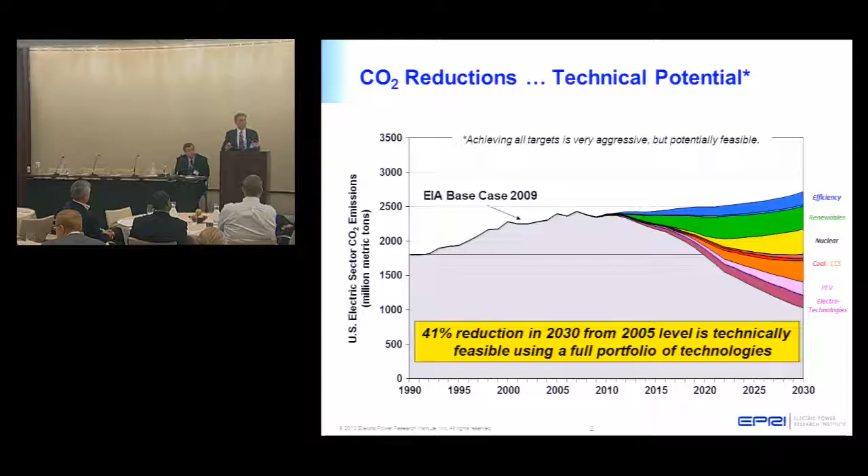You heard Kevin talk about uncertainty. All of you are facing it out there. What are you going to do with all these plants when you've got all this barrage of environmental regulations facing you? And so what we did is we developed a model, which I'll talk about in just a moment. But first of all, Kevin talked to you about EPRI. I'm not going to say any more words about EPRI. He did a nice introduction of what EPRI is.

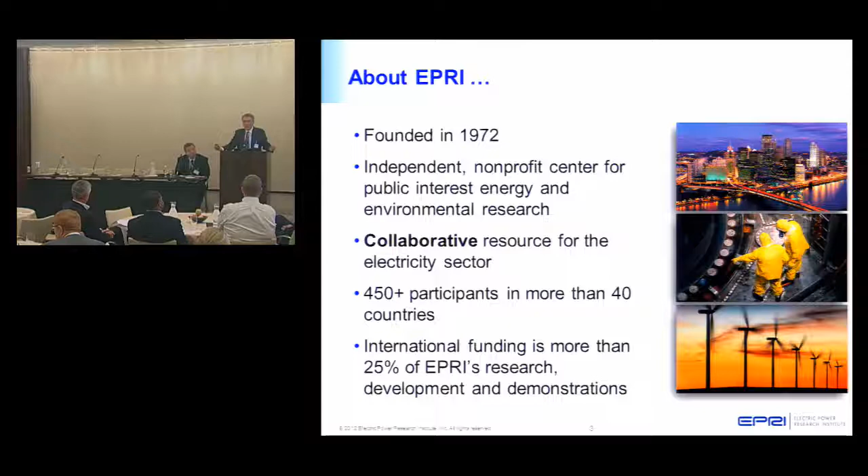But the only thing I will add to what he said is EPRI is a non-advocacy organization. We don't lobby. We don't push for positions. That's what Quinn Shea sitting there in the back of the room does at EEI. They advocate. He takes that information that we do, or you in this room can take the information that EPRI generates and go do your own lobbying, do your own advocacy kind of work. We do the research, do the analysis, we put it out there, we let people use it. We do not take any position. So that makes our research credible, objective, and fair. So people can argue with it and what our findings are, that's okay. Challenge us in what we do. But we're a totally non-advocacy organization.

All right, PRISM 2.0. I brought you up to date on what that is. PRISM 2.0 is a mathematical model of the U.S. economy, and I'll talk to you about that a little bit here in a minute. But it allows us to ask what-if questions. When you do modeling analysis and do scenarios, you can say, what if gas prices change? What if the performance of this particular technology doesn't live up to what it should be? What if it's better? What about the cost of the technology? Its availability? Those are the kind of what-if questions you can ask.

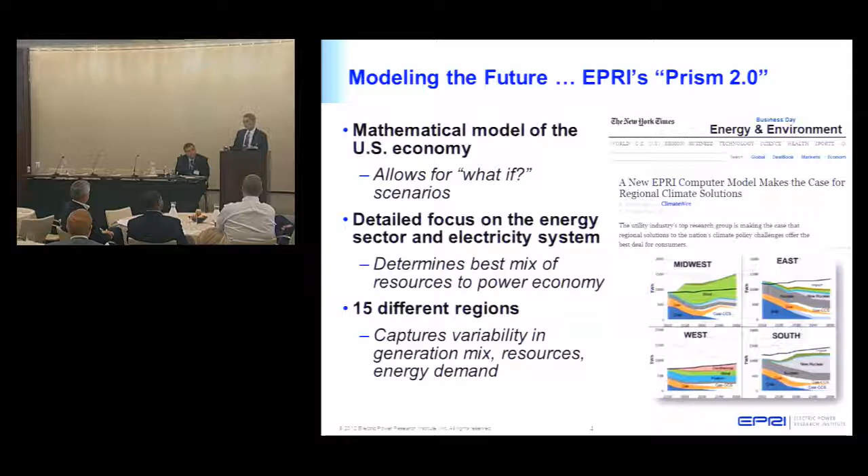And we also did this regionally. A lot of times when people do analysis of all these different kinds of regulatory analyses, they look throughout the whole U.S. But the U.S. is not homogeneous, right? Things are different in Florida than they are in California, in New York, in the Midwest. The economies are different. The technology is different. The resource mix is different. So we wanted to have a model that really looks at the various parts of the U.S. economy. So what we did is we developed a model called US-REGEN. It stands for the U.S. Regional Greenhouse Gas and Energy Model. It combines dispatch and capacity expansion with a high-level computable general equilibrium model of the U.S. economy.

So we developed this model. We developed the model internally at EPRI because we felt we needed to have our own tool rather than using other people's models. Of course, when you develop a model, you've got to have data to run the model. You've got to have data on technology. You've got to have data on the economy of these different regions. And so we at EPRI obviously develop a lot of information on control technology cost and performance, and so we can incorporate that information and other information into this model.

We did this analysis in two phases. One was on what I'm going to talk about today, the environmental rules and regulations that you're all facing now. That's phase one, and those results are available. That report's been published. The second phase that we're working on now I will not be able to tell you about, but I can tell you generally what we're doing. We're looking at three different scenarios on CO2. One is a CO2 tax scenario, so many dollars per ton of CO2. What would the implications of that be?

The second one is a carbon efficiency scenario. Think about it as the NSPS that EPA is rattling around about for existing units and new units, 1,000 pounds per megawatt hour kind of number. And the other one is a clean energy scenario, where you would get clean energy credits depending on your mix of generation. So you'd get higher credits for nuclear or for renewable energy that doesn't produce any CO2, some kind of partial credits for natural gas combined cycle, zippo credit if you have coal. So those are the analyses that we're doing now. That report is in final preparation, under review. It'll be out sometime this summer or fall.

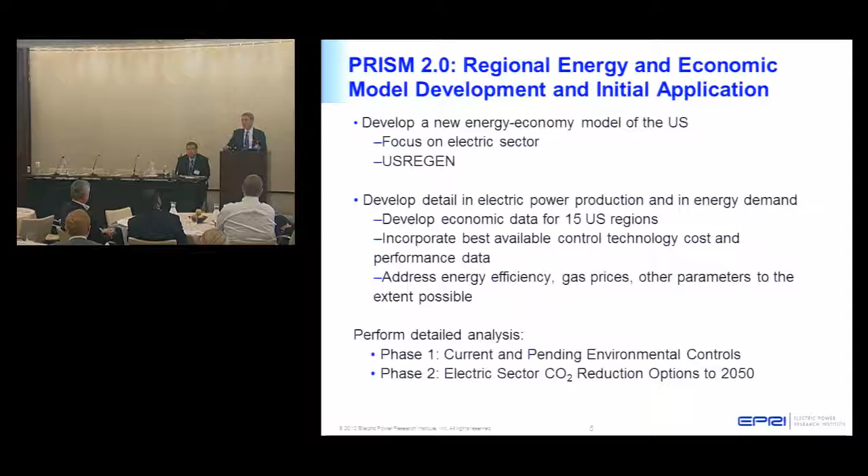All right, here are the regions that we modeled. There are 15 regions here. We picked them so they're loosely related to the NERC regions, but I call that very loosely related. Also, California, Texas, and New York are kind of their own islands when it comes to energy policy, and so we broke those out separately. We also try to look at the resources. There's more wind in the Midwest, for example, so we wanted to have that as a region. And in the Northeast Central, we have both competitive markets and regulated markets, so we had to try to break it out that way. So this is what we did in terms of developing our tool.

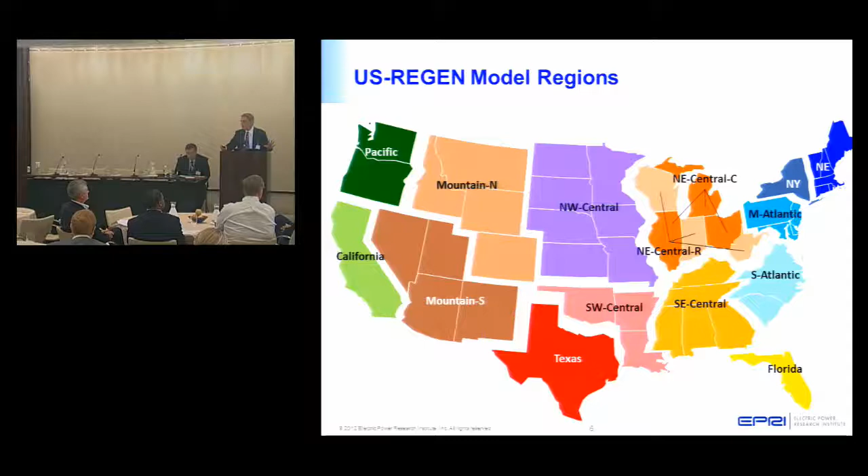It's very important, before I start showing you results, which I will do here in a moment: what are the limitations of models? Models are approximations, they're representations of very complex systems. We are not trying to model every one of the electric power companies sitting in this room. It can't be done in a model like this. So you have approximation errors. We can't really look at the system dynamics like you can when you do your modeling within your companies. And of course, the data quality we get is as good as we can get, but still there are inconsistencies in data quality.

It's very important that when anyone stands up here and shows the results of modeling exercises, we're not trying to predict the future. We're only trying to do a number of analyses, do scenarios, ask what-if questions. You heard Kevin talk about uncertainty, trying to narrow that uncertainty, so you sitting in this room can make better decisions. That's the purpose of these models. And not only that, but there are a lot of things we can't model. We can't model how policies could change at the last moment, how a permit process may change at the last minute, how siting decisions may change at the last minute. You've got to do the best you can. So again, models and the analysis I'm going to show you are just trying to get insights to help you narrow uncertainty.

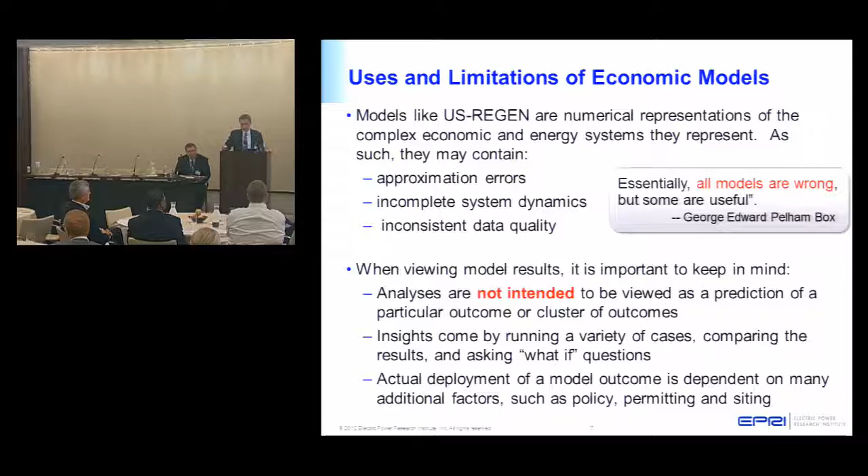See what George Edward Pelham Box said: essentially, all models are wrong, but some are useful. We hope that the REGEN model that we've developed is useful, but certainly it's not perfect. All right, let's get into some of the analysis. What we looked at in our study were four major boxes, if you will, of environmental rules and regulations.

At the time we were doing the study, which we started in late 2010, the cross-state air pollution rule was still underway at EPA. As all of you know, that rule has been vacated. It was vacated in, I think, August of 2012. As you notice, the report came out in September of 2012. So at the time we were doing the study, we were assuming CSAPR, the cross-state air pollution rule, was going forward. Also, we wanted to model the ambient air quality standards because they affect all of you.

Ambient air quality standards for SO2, for NOx, for particulate matter, for ozone. States do the state implementation plans. That has an impact on all of you too in terms of your emission reductions. Then there's that thing called MATS, the Mercury and Air Toxics Standard. Major impact on everyone sitting in this room. And finally, on the water issues, the Clean Water Act 316(b) rules for impingement and entrainment control, and the coal combustion residuals rule.

The important part about this is that you sitting in this room, you don't look at these rules individually and say, well, what am I going to do about MATS, putting blinders on to CSAPR, putting blinders on to 316(b), putting blinders on to the coal combustion products rule. You say, what are all these rules going to do in total with each one of my facilities? I need to look at what are going to be the combined impacts of this.

What we didn't include in this analysis were the effluent guidelines, which were just issued by EPA. That's not part of this analysis. We're thinking maybe we should overlay that on top of all this too to see what those implications are going to be.

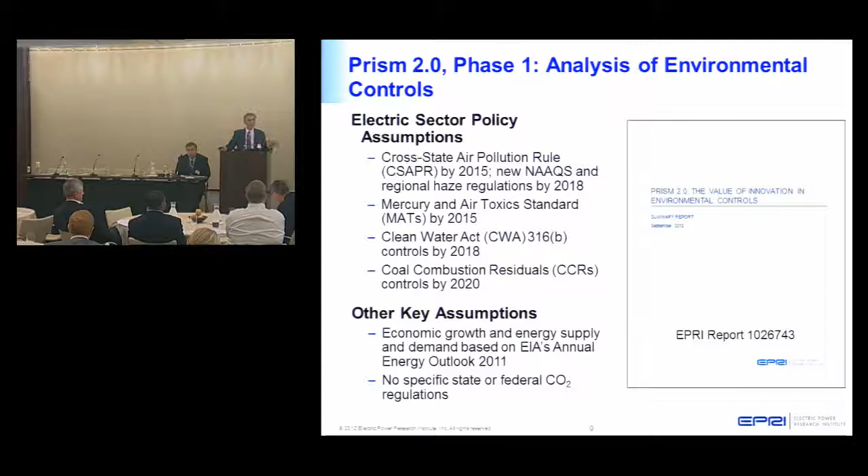So we ran three cases. I'm going to show you the reference case scenario. Then we ran a higher cost case and what we called a flexible case, a lower cost case. But let me just give you the highlights of some of the assumptions we made in coming up with these numbers. And what we show here is generation in terawatt hours over time.

For SO2, we assumed under this reference case that plants burning bituminous coal are going to have to use some kind of FGD system, wet or dry FGD system, lime spray dryer, or more likely a wet FGD system. For NOx, all power plants are going to have SCR. Actually, going back to SO2, the emission limit that we assumed would be 0.15 pounds per million BTU under this scenario. For NOx, 0.1 pounds per million BTU using an SCR system.

For mercury, we assume that most plants are going to have some sort of FGD or SCR. They may have to do some trimming, some activated carbon injection, maybe some particulate control upgrades for mercury control. Otherwise, they'd have to put in an activated carbon system with a baghouse. For 316(b) rules, in this reference analysis, we assumed all plants that didn't have cooling towers would have to put in cooling towers for closed cycle cooling. And for coal combustion products, we assumed the non-hazardous waste or Subtitle D regulations under RCRA. So those are the key assumptions in this analysis.

And what you can see is that virtually every power plant is going to have to be retrofit. Very few power plants, hardly any power plants today have those combinations of technology on them. So they're going to have to be retrofit. So coal-based generation is going to decline. So you see here, right there, coal-based generation starting to decline after about 2015.

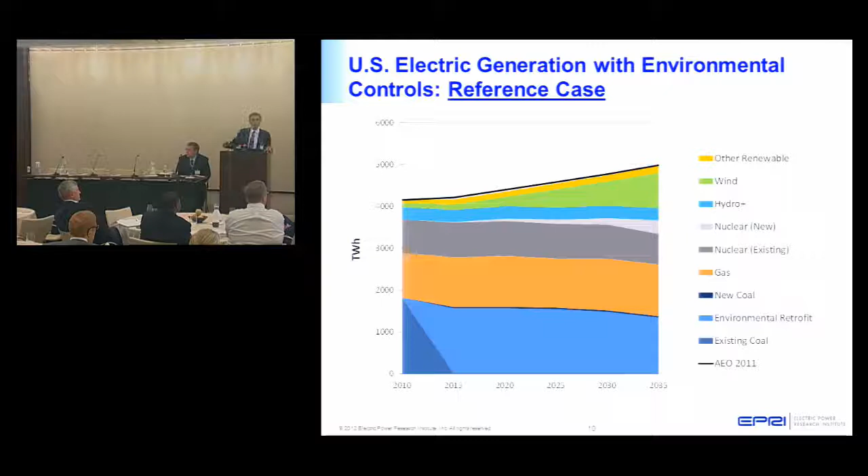No new coal, as I said, no new coal is here. That would be new coal. Nuclear, some new nuclear. We allowed new nuclear after 2020, and quite a bit of an expansion of wind, of renewable energy. And this is mainly due to price declines that we anticipate for wind energy going forward.

So I said we did this. This was the regionally based model. I couldn't in one slide show you 15 regions, so we kind of combined them here into 4 regions. But you can see, even if you combine this into 4 regions, that you see regional differences. Looking at the western and midwestern part of the United States, you see that the coal-based generation here stays relatively flat in the Midwest and the West.

And that is because those are the larger, newer units that are in the West and in the Midwest, compared to the South and the East, where you see significant coal declines. Coal, I probably could do it over here on the other side, but you can see declines in generation in coal. That is because they're the older, smaller, less efficient units that are retiring or refueling with natural gas.

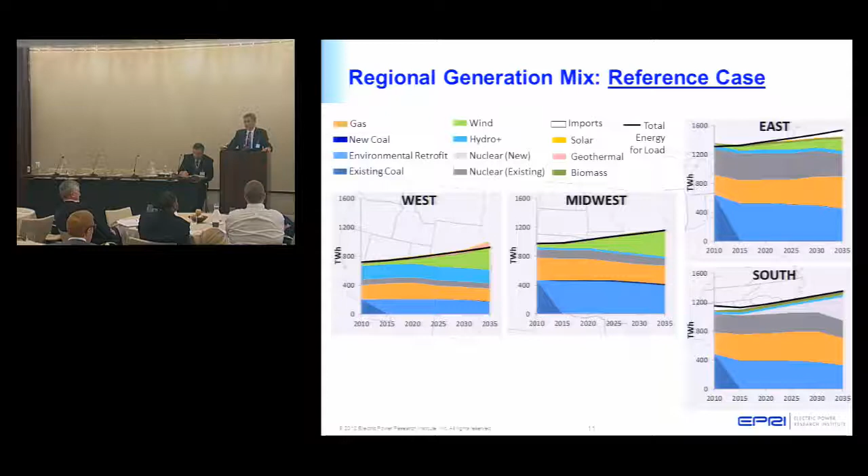So what about retirements? Under the reference case, the model predicted roughly 57 gigawatts or 57,000 megawatts of coal capacity would be retired or refueled with natural gas. We don't know. Those are decisions you're making at your company, whether you could refuel or you need the capacity at those sites, whether you would retire it, or in some cases I've talked to people who are just going to mothball it. They're not going to make any decision. They're just going to mothball those units. So again, these are the older, smaller, less efficient units.

But then you got this kind of 28 gigawatts here in the middle that are really going to be company by company decisions. Your cost recovery period for capital is going to be a very important decision process. Your region and unit specific decisions. Some of these are must run units. You may not want to keep them, they're old, but you must run them for voltage control or whatever it is in the region. Changes in market prices.

You may think that over time our economy is going to improve, or because there are going to be constraints here in our market, it's important to keep this unit, even though it may not look very economic. I expect prices to go up, and therefore it might be worth keeping this unit. So those are some of the factors that are in here. There's a lot of uncertainty. That 28 gigawatts is a lot of uncertainty. A lot of you probably are sitting here scratching your head going, I'm not sure what we're going to do with these units.

And the model, it's really razor edge decisions because the model makes an economic decision. But those are the ones that we looked at in our model that were really going to be difficult. But the other important part is there's still 227 gigawatts of coal capacity that are going to operate. Coal is not going away. That's still a lot of coal capacity that's still going to be operating in the U.S.

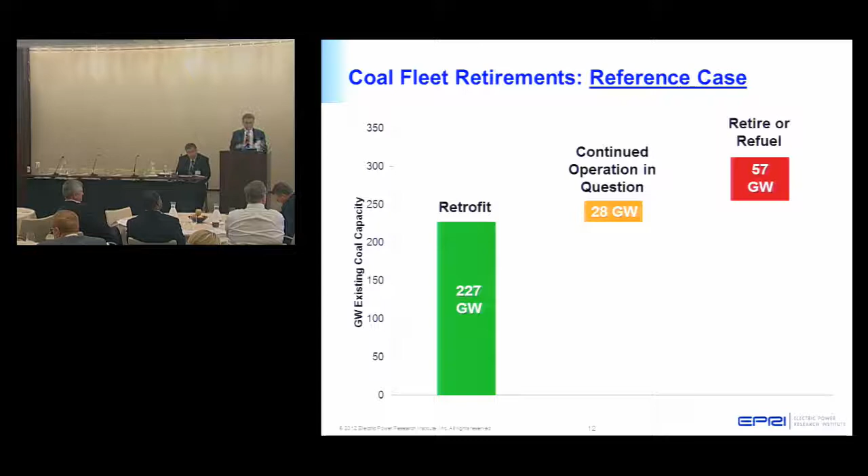So I said we ran several scenarios. We called them our high scenario and our flexible scenario. Think about it as inflexible and flexible. Under the high scenario, we basically said there's not going to be enough time to really look at lower cost options for SO2 control, for example, using dry sorbent injection. You're going to have to go with the tried and true. You're going to have to use wet scrubbers or lime spray dryers, the technology that's been around forever. You're not going to have time to go test much of anything.

We also said that there's going to be some cost escalation in this high case. Think about when there was a high demand for combustion turbines many years ago, and GE and others were saying, if you want to get higher in our list to get these turbines, you're going to have to pay a premium. Well, if the time constraints that EPA has put out are such, there may be constraints on labor and materials, whether the vendors that are sitting in this room can really supply the technology rapidly. So we looked at the literature and said, let's put in a supply constraint.

That would increase the cost of the technology, given very little time flexibility. And also in the high case, all power plants would have to have closed cycle cooling. You'd have to put a cooling tower in every plant no matter what.

So that's the high case. The flexible case is just sort of the flip side of that. Now that you've got some extra time, the administration, EPA, grants the extra 2 years, you have some additional time for compliance, you have time to test lower cost technologies, to see whether or not these technologies will perform as you hope they will perform on your facility.

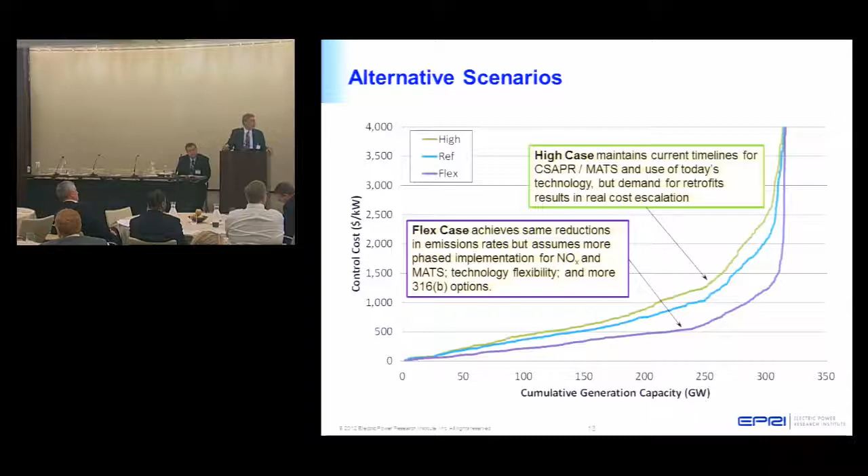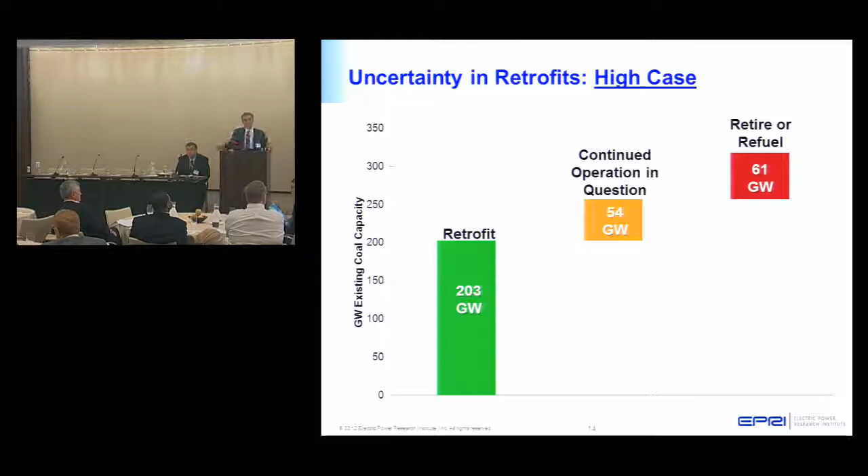So now you look at the high case, the high cost case, the kind of less technology flexible case, and you see now what have you got? You got more units that are going to retire because you got higher costs. You also got more units that are in this middle category of what am I going to do with them? Because now your costs are higher. And of course, you've got less coal that would be retrofit, just because, again, higher cost, shorter time constraints. When you look at the flex case, it's different.

The difference in cost on a net present value basis between the high case and the flex case is $100 billion. And that's a lot of money. On the high case, the total cost to this industry on a net present value basis is $275 billion. That's to the U.S. economy. That's a lot of money. And most of it's incurred by the electric sector.

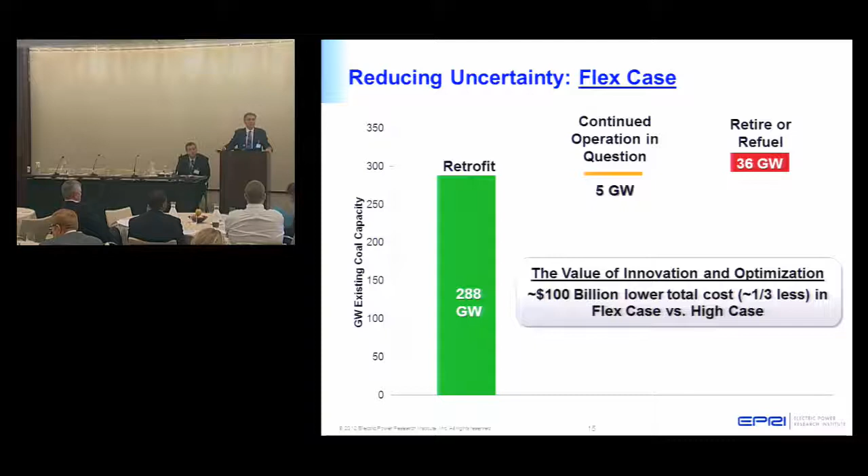And $100 billion is a lot of money, and I don't know quite where this is all going to come down in terms of what these rules are going to finally cost all of you sitting in this room. But nevertheless, if it's $175 billion, that's still a lot of money because it translates into cost of electricity for all of us that are consumers of your product.

This just shows you in a bar chart the cost on the high case and the reference case on a net present value basis for gross domestic product. As I said, most of the cost, whether it's $275 billion or $175 billion, is going to be borne by the electric sector. There are costs to the U.S. economy for higher costs of electricity, higher costs of natural gas, as the demand on natural gas is going to go up. So out of that $275 billion, something like $230 billion or $240 billion, I can't remember the exact number, are cost to the electric sector. The remainder is cost to the U.S. economy.

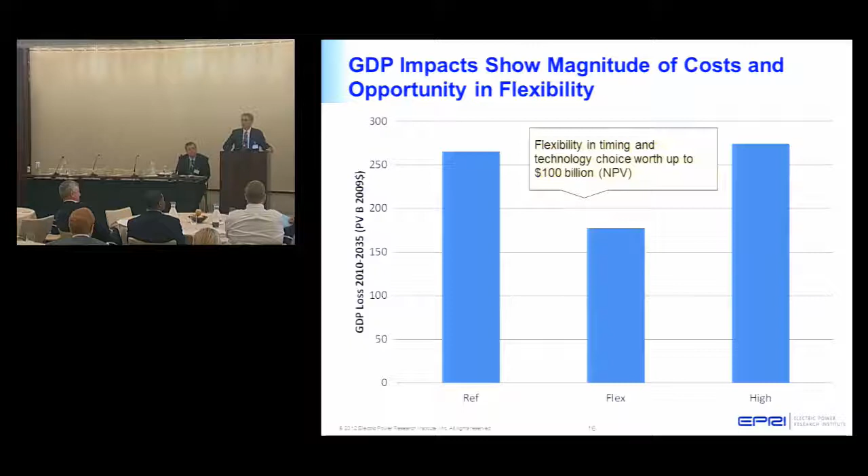I mentioned gas prices. When we ran this analysis, we used the prices that EIA had for natural gas. At that time, for AEO 2011, gas prices were something under $6 a million BTU. Where are they today? $4-ish a million BTU, something like that. And so we decided we needed to run some sensitivity on gas prices. So we did +2, -2: up $2 a million BTU, or less $2 a million BTU.

And you can also see, when we were finishing the analysis, we had the AEO 2012 numbers, which is this yellow line shown here. And I was at a conference last week in Washington, and AEO 2013 came out, and the prices for natural gas are further down, lower yet. It's a curve that kind of goes down here. But even the price difference between 2011 and 2012 from the Annual Energy Outlook, AEO, was about $1 a million BTU.

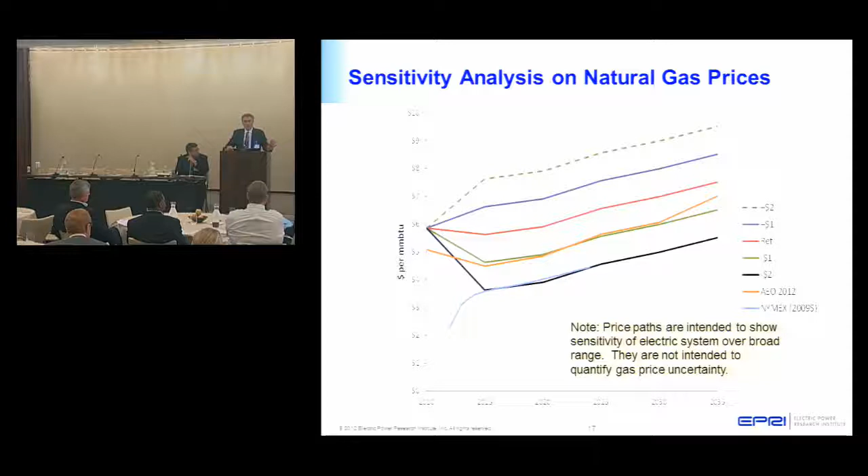It was significantly lower, and it was lower again for 2013. So we ran this analysis to see what the impact of natural gas prices is, because all of you sitting in the room know this has a major impact on your decision process. So when you look at it from the retirement standpoint, as you can see, if the gas prices were actually higher than when we ran the model, there would be less retirement, right?

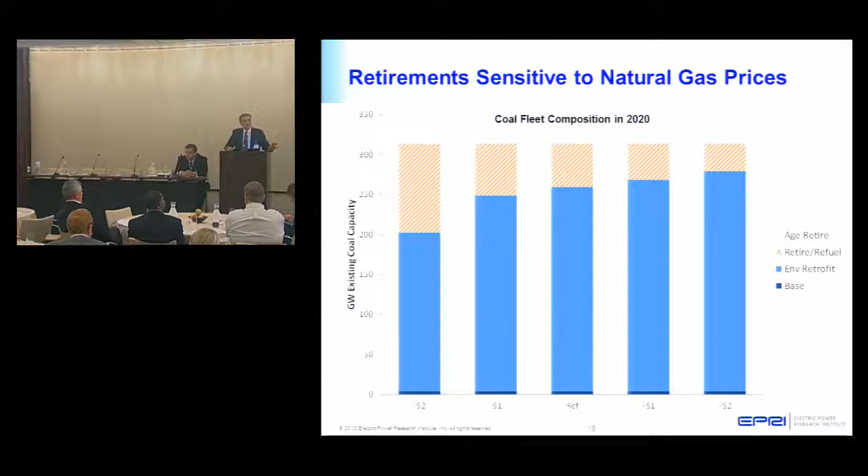Because if natural gas prices are higher, you go, you know what, coal looks pretty good under gas prices at $8 a million BTU. But if you get gas prices down here around $4 a million BTU, this is where you see a pretty significant drop in coal-based generation or coal capacity. And for those of you looking at the coal markets and the gas markets, $4 a million BTU gas versus coal prices today, that's when things are starting to reach some parity, around that gas price. So from our modeling, that's what showed up here as well.

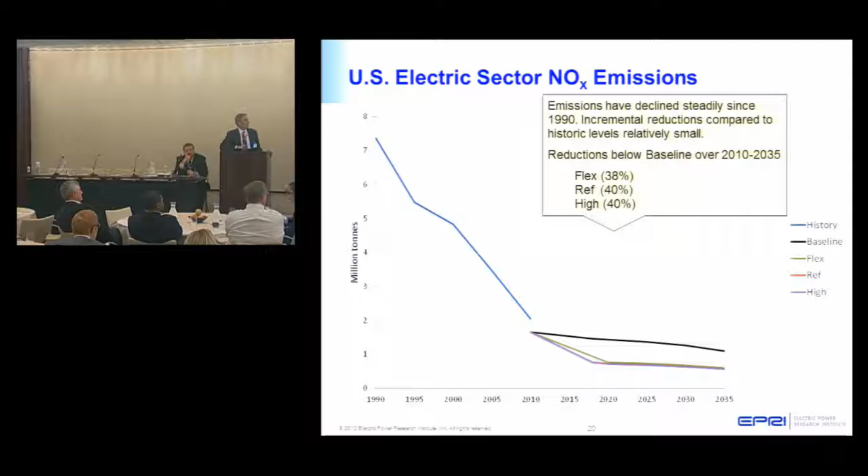But the last point I want to make here is even at 1 million tons per year, you know what the highest emitting sector of SO2 emissions is in the country? The electric utility sector. It's still going to emit 50% of the SO2 emissions in the U.S., even at 1 million tons per year. Similar story with NOx. I don't want to belabor it, but if you extend the timeline by a couple of years, the net increase in NOx emissions is going to be very, very small.

All right, insights. The cost range that I said, somewhere between $175 to $275 billion on a net present value basis from 2010 to 2035. Is it going to be as high as 275? Probably not. That was the inflexible case, the high scenario case. I fully expect that EPA and the administration will allow some flexibility, so the numbers are going to tend toward the 175 rather than 275.

And this cost range is really driven by the ability to deploy lower cost technologies, the ones that you, the vendors out here, are developing to help these utilities say, look, there are alternatives other than putting on a full-blown wet scrubber, which is very expensive on a relatively moderate size unit. There are some things you can do that are least cost. And so we thank all of you in the vendor community that do that. The cost impacts are going to be higher, obviously, in the coal regions where coal is dominant. Gas prices are going to be extremely important, as I've mentioned several times.

Retirements are going to vary substantially. I'm sure some of you are still scratching your heads about, am I going to mothball this unit? Am I going to retire this unit? Am I going to convert it to natural gas? What am I going to do with these units? Coal is going to play a significant role. Those people that say coal is going away, it's not going away. There's still going to be a significant amount of coal in this country.

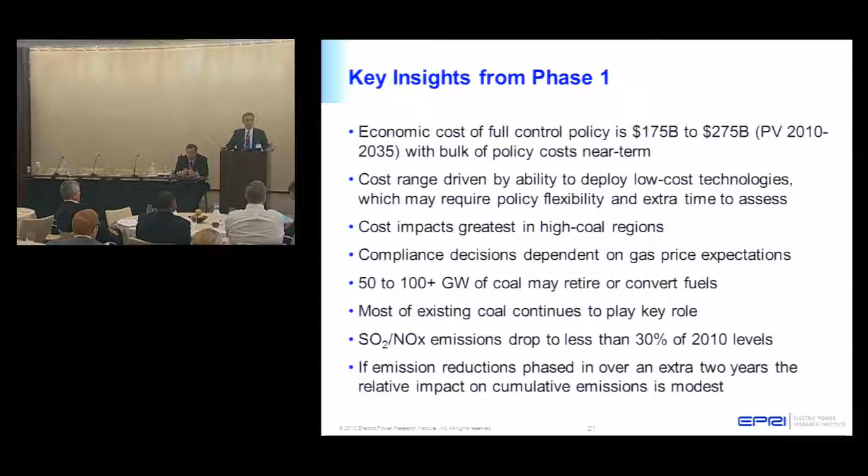And if these emission reductions are phased in over an additional couple of years, there's a very modest change in terms of emissions. So, kind of summing up, there's a lot of opportunity out here for innovation. And again, I'd like to thank those of us in the vendor industry that work with EPRI as well to try to come up with innovative technologies to lower cost for all of you, because lower cost of compliance means lower cost of electricity.

Also, the research community, the vendor community, we're trying to help all of you sitting in this room clarify your retirement retrofit decisions. These aren't easy. These are extremely difficult. Reduce your total compliance cost and meet these desired emission rates. They're not going to be easy, and you've got to do it on a continuous basis. You're going to have continuous emission monitors for most of these things, and these are tough. Measuring PM on a continuous basis is difficult. Measuring mercury at very low concentrations, extremely difficult.

But kind of the bottom line is, is this the end? Once this is over, is this the end of emission controls on power plants? I don't know. Quinn can talk about that when he gets up here. But my guess is that you've got this thing called CO2 still looming out there. What are you going to do about CO2 if it comes? What are you going to do with those coal units? Carbon capture and storage, extremely expensive technology.

And also, even with hazardous air pollutants, EPA has to do something called a risk analysis. A risk analysis once all the controls are on power plants. And is that sufficient? It's called a residual risk analysis. Is that going to be sufficient where we are today? Or are we going to have to do further on arsenic, chromium, mercury, go down the list of hazardous air pollutants? So that's my story, and I'm sticking to it.

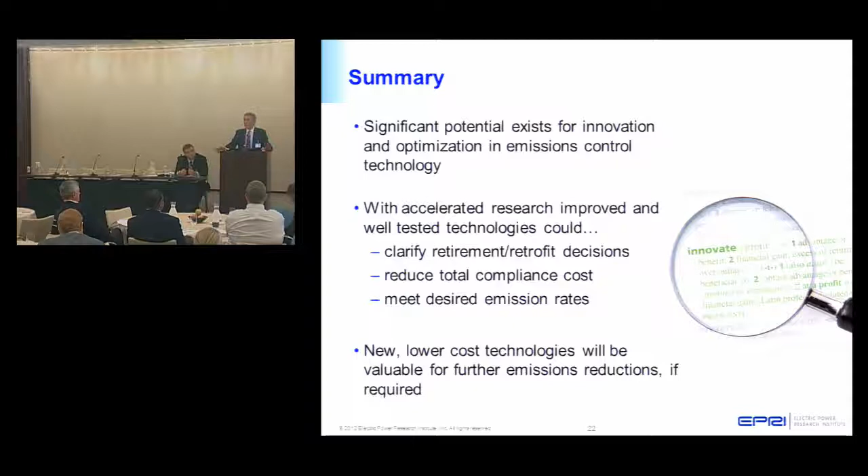You spoke a lot about innovation and room for optimization. And then at the same time, you said that there is a tight time window. And if I add to that the time scale that we know it takes for procurement, permits and so on in the United States, how is all that going to fit? Where is the time for innovation to come in and help those that need to deploy emission controls? Yeah, the question is, where's the time for innovation?

It's difficult. I mean, it is really difficult to bring a new technology to market, and all of you know it, and those of you that are in the vendor community, it takes a long time to do it. So the innovations we're really talking about here are, for example, can we use dry sorbent injection technology on units where maybe we thought we couldn't use them before? And if you're going to use Trona, or maybe something like a sodium-based sorbent, you've got to think about the multimedia impacts of that. What is that going to do to my ash now that I have a soluble product?

And if I'm in a net rainfall area, oops, I've got this thing called the coal combustion products rule that's coming down the road from EPA. And now I've got solubilized product that I've got to manage as well. What am I going to do about that? So your question is right. A two-year extension is not going to allow for truly new innovation in technology. It's not going to do it.

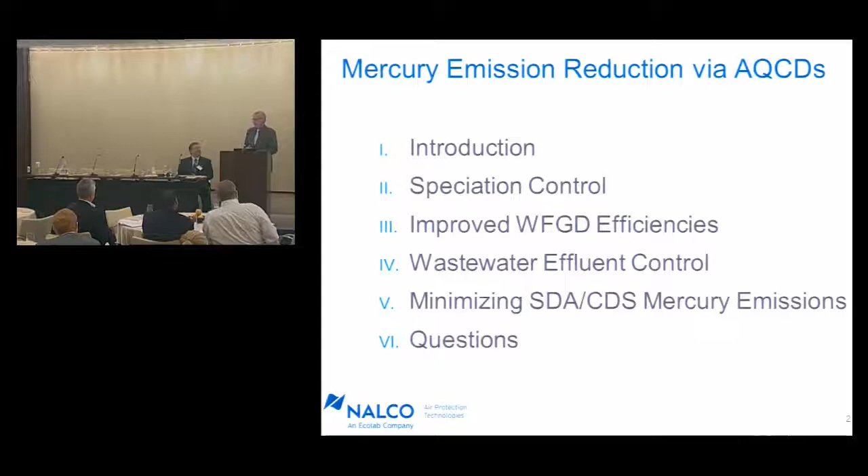I'm not going to be reading the slides to you. I hope not anyway. They're here so that you can read them, and so we'll just move on from there.

Controlling mercury emissions begins with 2 steps. I'm sure that by now you're deep into this, trying to figure out your strategy for controlling mercury. You understand now that there are 2 aspects to this process. You first have to control speciation or manage speciation of the mercury in your flue gas. The second thing you have to do is capture it.

So when it comes to managing first your speciation, you've seen this, it's been reported by EPRI, it's been reported by EPA, it's been reported by just about everybody across the industry. It begins with understanding your fuel source. The fuel source, or more specifically your halogen content in that fuel source, does begin to dictate to you what the speciation is and how efficient your unit will be in capturing total mercury.

There are many components in your flue gas. You can see those there, but specifically what you're trying to do and what we've seen is higher halogen, higher speciation, better capture, better probability to meet the regulations.

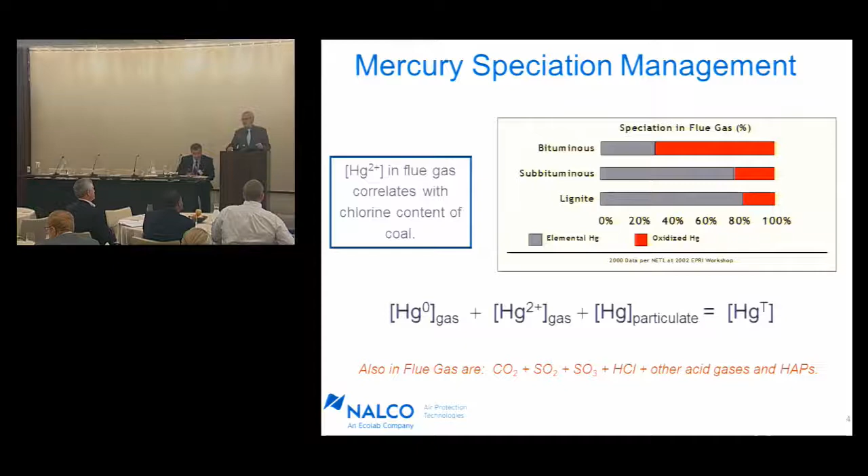What you'll notice that, and I'll try to go this way. I'm sorry, I'm right-handed, so I go left-handed. I guess that's the way it is.

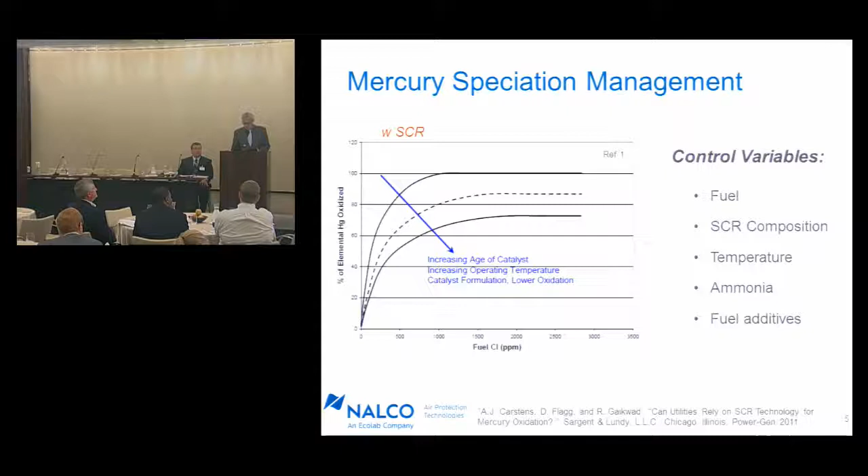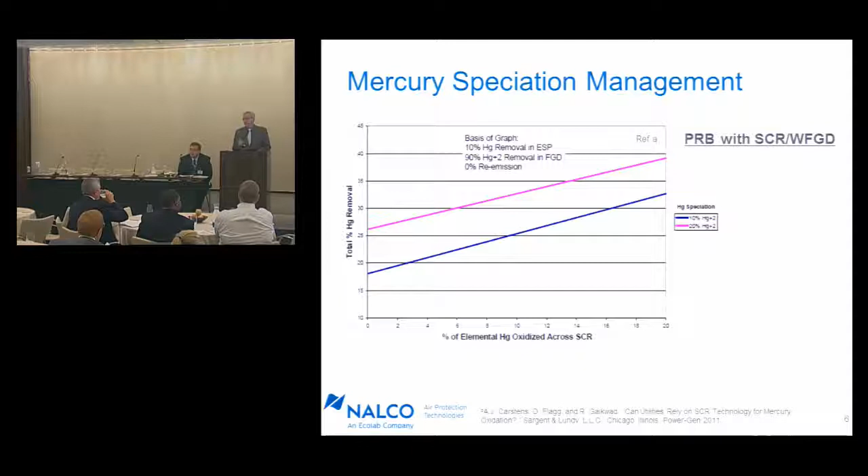Why? Again, it's all about controlling mercury speciation. If you control mercury speciation, you maximize that so that you have the potential of meeting regulations. The next step is you got to capture it. You got to put it somewhere.

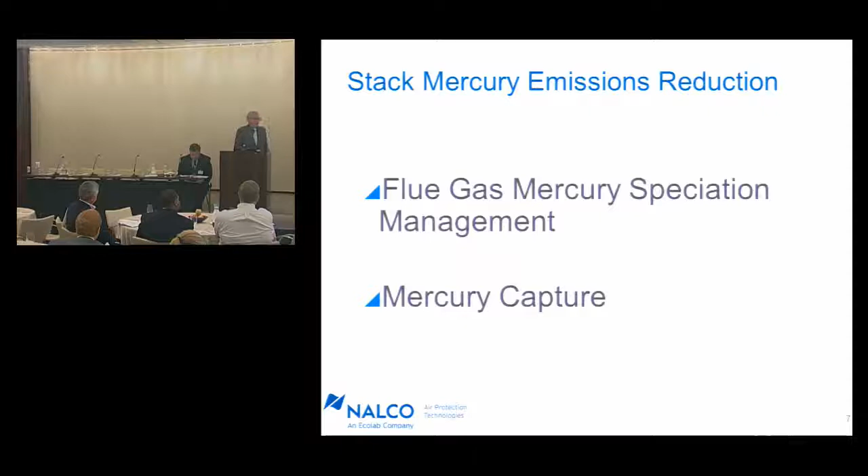With existing air quality control devices such as a wet FGD, it's relatively simple to do because a lot of these types of scrubbers have been installed in the industry. They are wet-based. The nice thing about oxidized mercury is it's soluble in water. So you have an opportunity to capture it at an existing air quality control device, something that you're running currently already. There are many different types.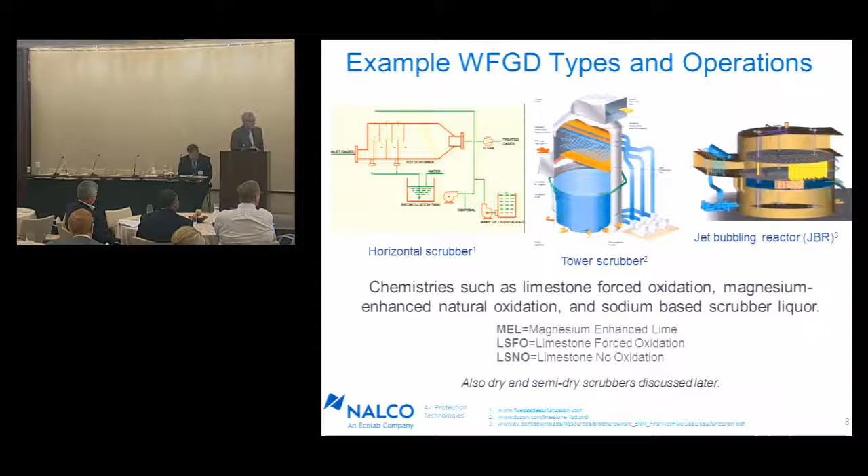There's many different chemistries. Point of matter, we've looked at these. We understand the variations among these different chemistries and operations, and we've provided a solution that works in all of these, and we'll talk about that in a few minutes.

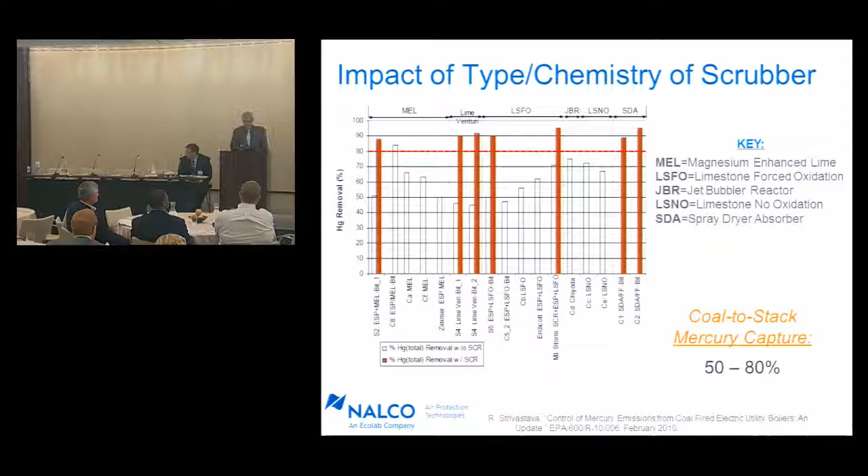The real question that came up at the beginning of all of this, as we looked at wet scrubbers, was if you look at the chemistries across here, and I apologize if this is too small, we're looking at very different chemistries, and we're looking at very different rates of removal across those wet scrubbers. There's a lot of potential here for improving efficiencies when some of them are already reaching over 90, 95%. And the question becomes, why is there a range from 50 to 80% capture of mercury across a wet scrubber?

It comes down to two answers. The first is mechanical, which is something that we can't do anything about, but you certainly can. Mechanical comes in to the types of things like, what is the pH that you're running your scrubber at? How often do you do blowdown? What is the chemistry of your scrubber in terms of at equilibrium? And what's it going to be?

The most important question that you need to ask is, what's your chemistry in your scrubber going to look like after 2015? Because it's not going to be the same. The storm has gone through, and we're going to be running at a different baseline condition.

The second thing, which is the chemistry within that scrubber, also impacts the efficiency of your wet scrubber for capturing mercury. And that relates to something called re-emission. I've shown it here, and very simply put, the easiest way you can tell whether or not you have re-emissions: measure the elemental mercury before the scrubber, measure the elemental mercury at the stack. If the elemental mercury at the stack is higher than the elemental mercury before the scrubber or coming out of the boiler, then you have re-emissions.

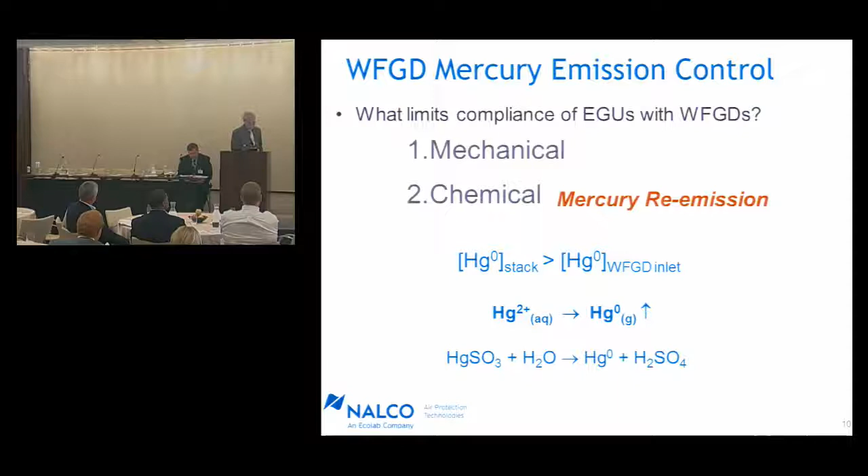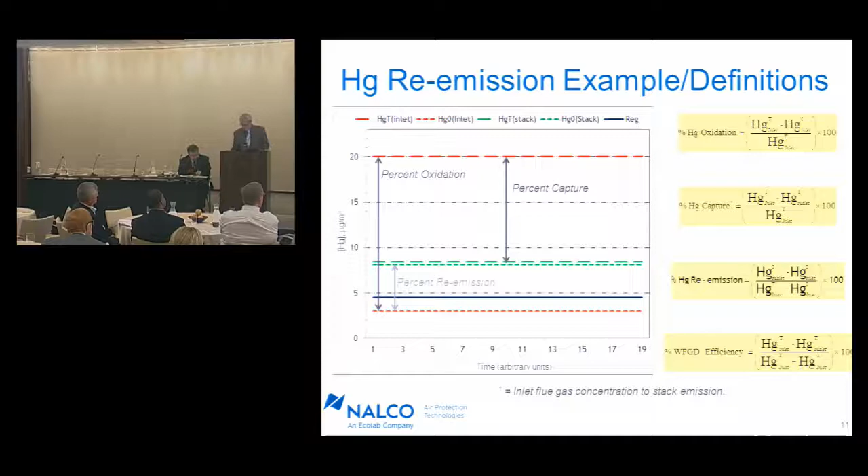If you have 15 to 20% re-emission, you're already below 90% capture, which means you're not going to be able to comply with mercury regulations.

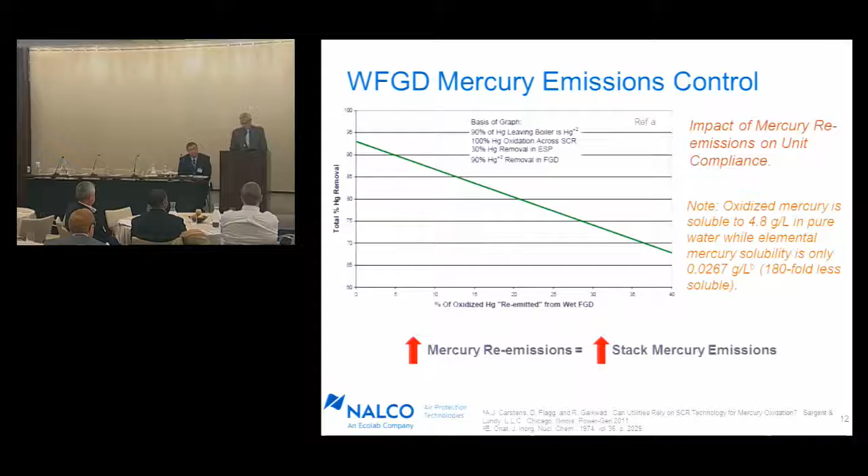Now, certainly in a million-gallon reactor, you're going to have a lot of opportunity for elemental mercury. But the point of the matter is, you've got 180 times more probability of capturing ionic mercury. And the idea is, get it in the ionic form, capture it in the ionic form, keep it in the ionic form, and get it out of your scrubber. That's the story in a nutshell. Higher reemission, higher stack emissions.

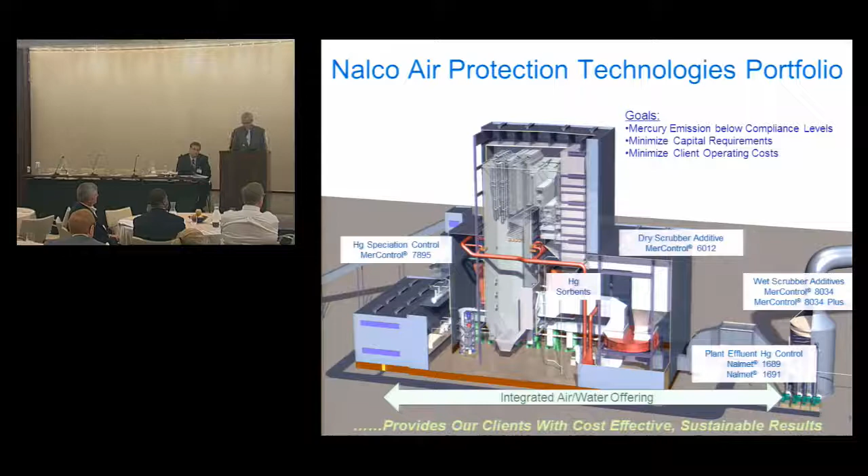We're about managing mercury emissions across the unit operation without impacting your operation, without impacting the quality of your ash, without impacting the quality of your byproducts or your water. Control speciation, capture it using existing air quality control devices, including potentially dry and semi-dry scrubbers. And do it based on innovative approaches.

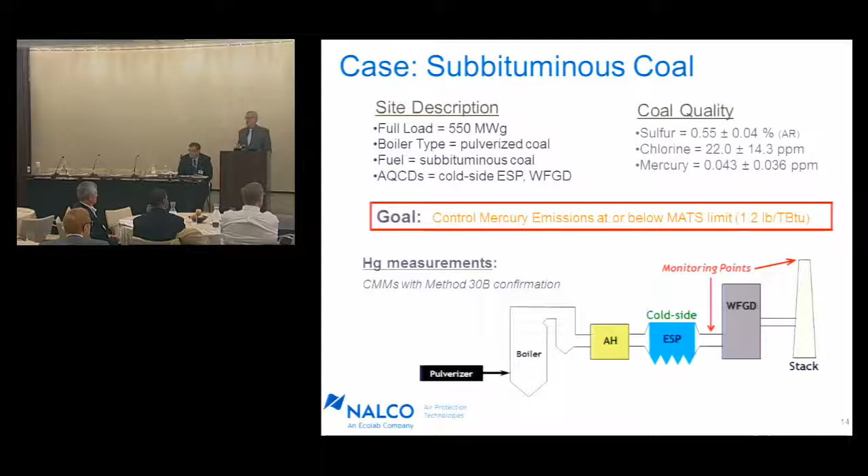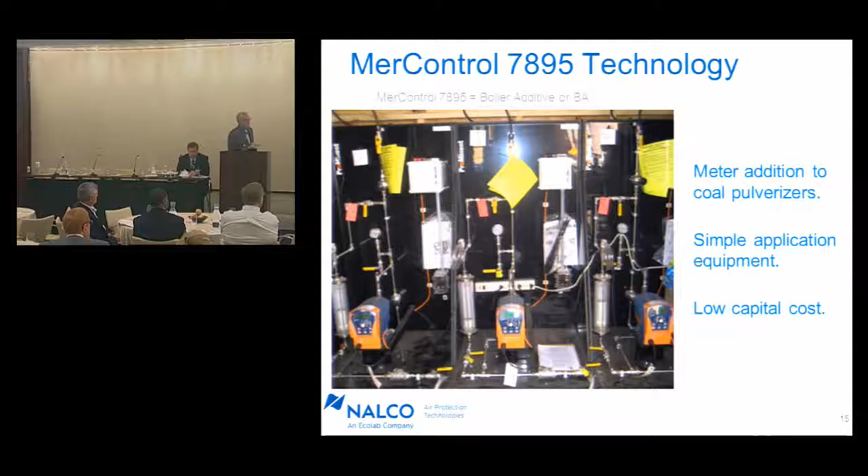I've chosen a subbituminous coal case because, as we talked about previously, it is the hardest to get to. These types of units have the lowest mercury speciation, so you have to first control speciation. This particular unit, if you look at the diagram, does not have an SCR. So not only does it have low chlorine content, it's also fighting an uphill battle because it has no SCR. If you use a boiler additive, such as the 7895, this is intended to get you your speciation coming out of the boiler. It's low cost, it's simple to apply, low capital.

I'll give you three things to think about in terms of defining a solution to mercury. Okay? The solution can be a permanent solution, which is what I'm going to talk about today. Also consider this as a temporary solution. We've heard continuously about the manpower concerns, construction, how are we going to get ready in such a short period of time? These solutions are intended to make your existing air quality control devices compliant now. Okay? You can be compliant to meet the regulations that are coming.

We will be continuing to develop new innovations going down the road. This allows you the time, once you've established your compliance on these units, to go out and test our next innovation to control mercury and HAPs. So it buys you the time. So that's the second thing that you should think of, and then it provides you the opportunity to continue to develop and add on as you need to ensure the continual operation of those units.

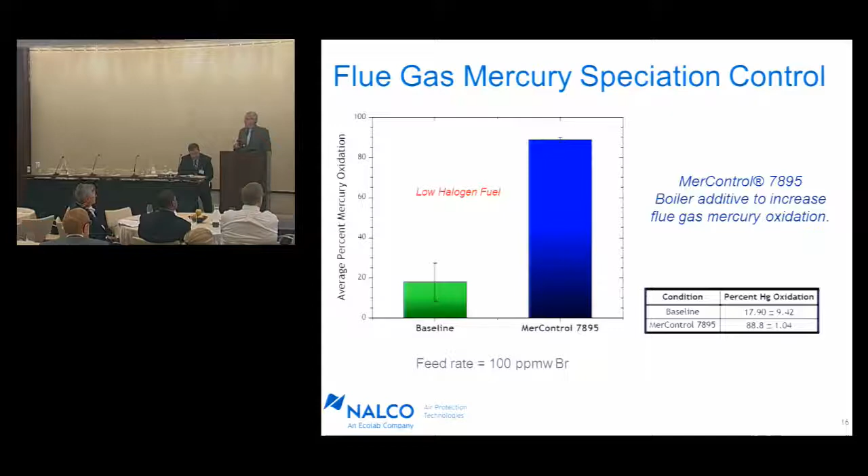If you have a wet scrubber, the next step is use that air quality control device, get the co-benefits. You're going to be operating it anyway. Let's use it to capture mercury, but let's improve the efficiency. Using this technology, using a scrubber additive, you can improve that efficiency to over 90%. It's a simple application and simple to maintain.

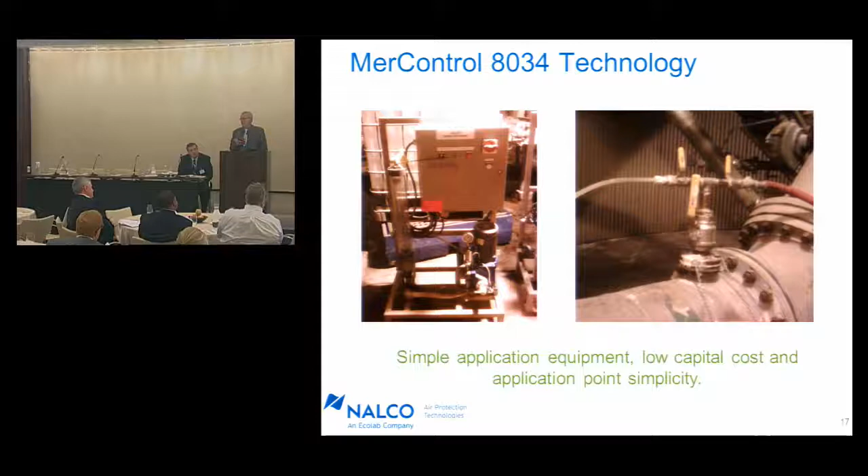What I'm showing here on the left is the feed system. What I do not show you in this presentation is the control module that we have developed. This control module is simple and easy to install. It can be installed as a temporary system during the demonstration. It controls the feed rate, responds to changes in load, responds to the changes in the boiler chemistry on a real-time basis. So as your load changes, as your operation changes on your unit, it makes the correction to minimize the use of additives while maintaining assurances that you are compliant and increasing your efficiencies.

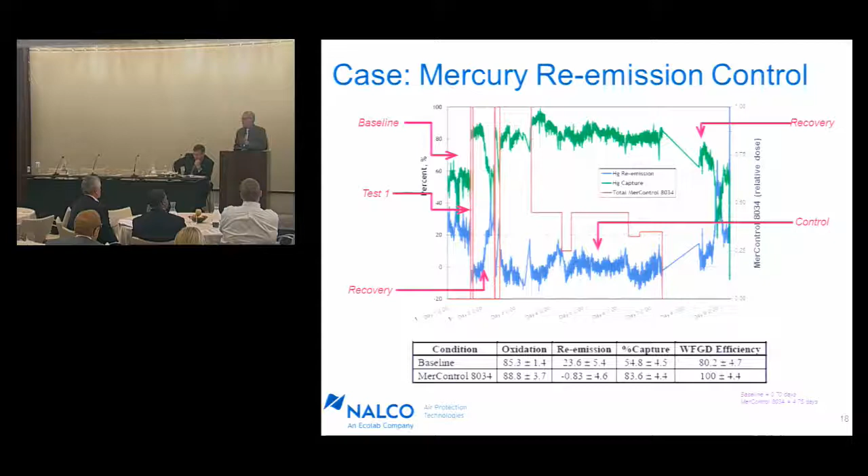Utilize your existing air quality control devices to do what you need them to do, as a co-benefit as well as the major benefit. So it allows you to reduce your re-emissions, increases your efficiency, and it brings your capture rate up to the level of your speciation. You have to get your speciation up above 75%.

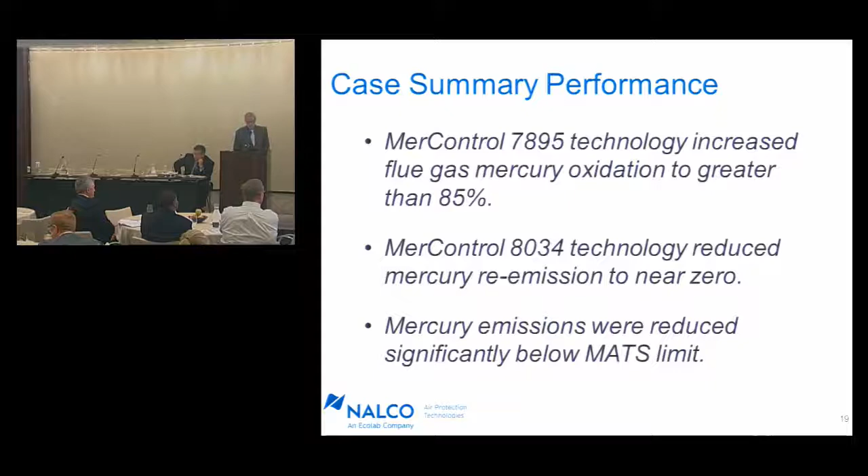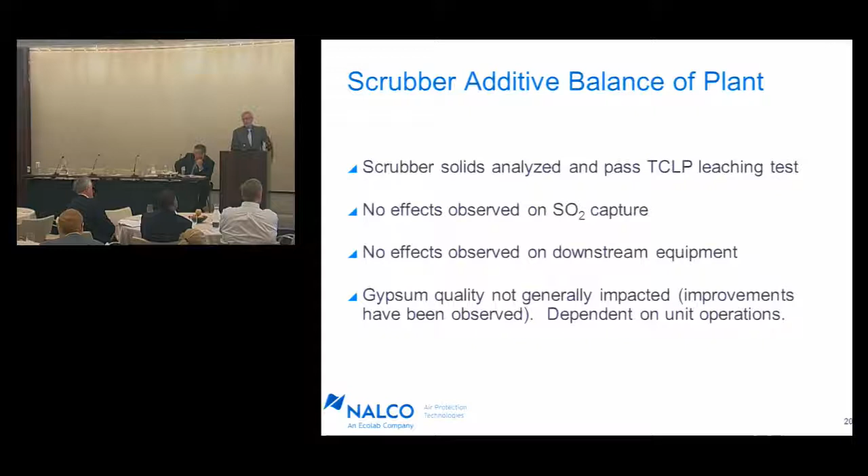I want to talk a little bit about, I've been talking about this as we go, the effective use of air quality control devices. There's a lot of different ways to capture mercury, particularly with the utilization of a unit that has a wet FGD. A lot of people today are looking at and evaluating the use of sorbents up front of a wet scrubber as a means to capture mercury. I'm not going to sit here and tell you that doesn't work. I am going to tell you that what you will probably not see during a demonstration is the downside of that strategy.

The downside of that strategy is that eventually the idea is you will capture mercury ahead of the scrubber, but none of those applications captures 100% of the mercury, none of them. In point of fact, I'd be surprised if you would want to feed enough sorbent to capture 100% mercury. You're really going to end up capturing just enough to meet your MATS with some insurance, which is exactly what you should be doing. What happens to the rest of that mercury, though? Where does the rest of that mercury go?

compliance to MATS limitations. This is the importance of understanding the strategy of using existing air quality control devices as the best available means to capture mercury. If you improve those efficiencies, you don't need to add other things. You can reduce your costs. And that's, as we've heard earlier today, what we're about: reliability, lower cost.

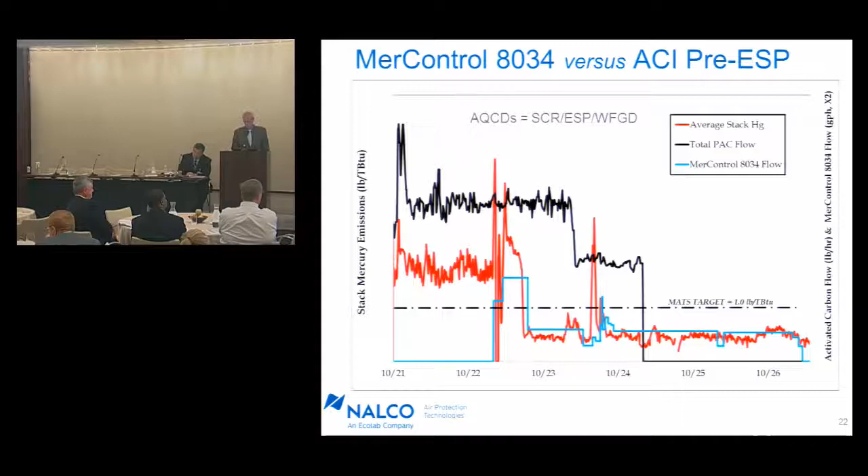We also heard about the need to continue to innovate, and that's exactly what we've done. I want to introduce a new product here. I'm not going to be taking a lot of time on this. It is a new scrubber additive that we're introducing called 8034 Plus. The key here is that it provides the following benefits. We've improved the toxicity, we've lowered it.

It's now considered, according to EPA definitions, and I laugh a little bit when I read this, practically non-toxic. I think that's the same listing as you would have for water. It's practically non-toxic. When I was dealing with my water in my kitchen last night, I didn't consider water as a non-toxic, but it's patented technology.

It's been shown performance. It does not add chlorine, as other additives to your scrubber do, and has improved shelf life. And we have already tested it, and it does perform very well in this particular application. That's all I'm going to say about it. But it's a next generation innovation that will help you meet your MATS limits.

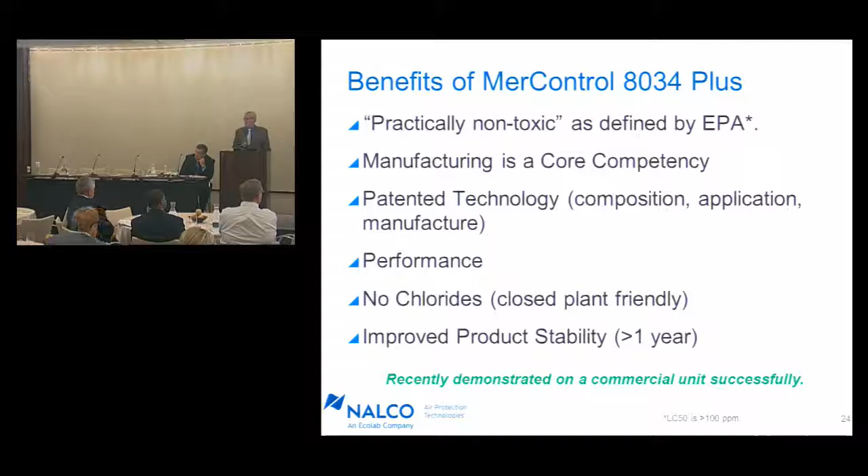One of the things that is always of interest: when I started in this industry, I was amazed by, quite frankly, the first unit that I came across, a 2205 alloy-based scrubber, and I was amazed to walk past it and see the Swiss cheese effect. I come from a company that deals with corrosion. I have seen it in the laboratory. I have seen boiler tubes and other constructed items that have corrosion, both general and pitting, localized.

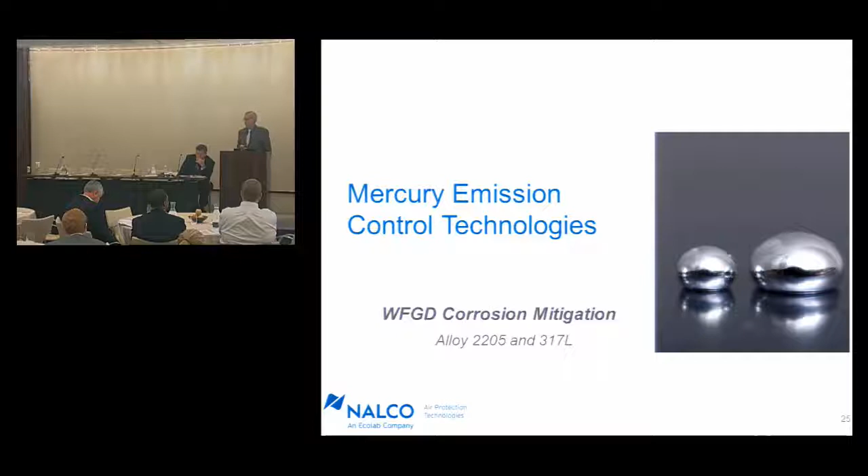And I was appalled to see the first unit scrubber that I walked past that, quite frankly, was leaking faster than they could repair it. And it was eye-opening for me. And so I was interested when we started to do some of the testing.

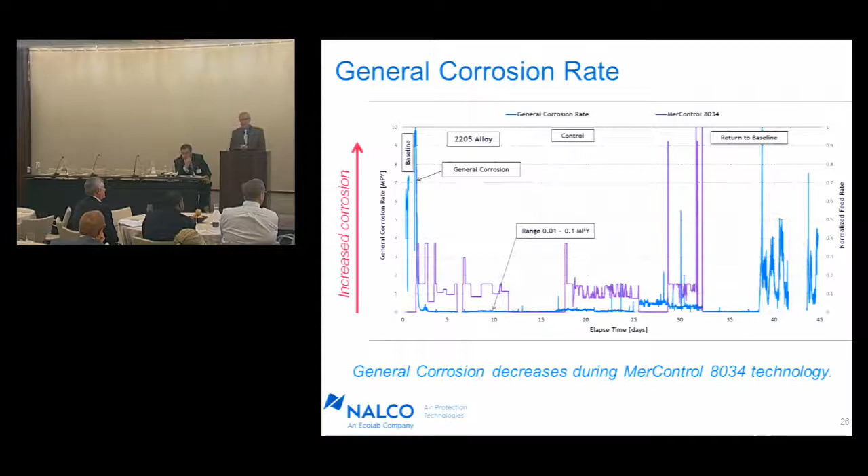Interestingly enough, the same thing is true for pitting or localized corrosion. The green line is localized corrosion. You can see during the demonstration period, with the application of the scrubber additive, very low localized corrosion, and when we stop the addition, a very high corrosion rate. We understand what's happening here on 2205. We now understand how to control this particular phenomenon, and quite frankly, this is real.

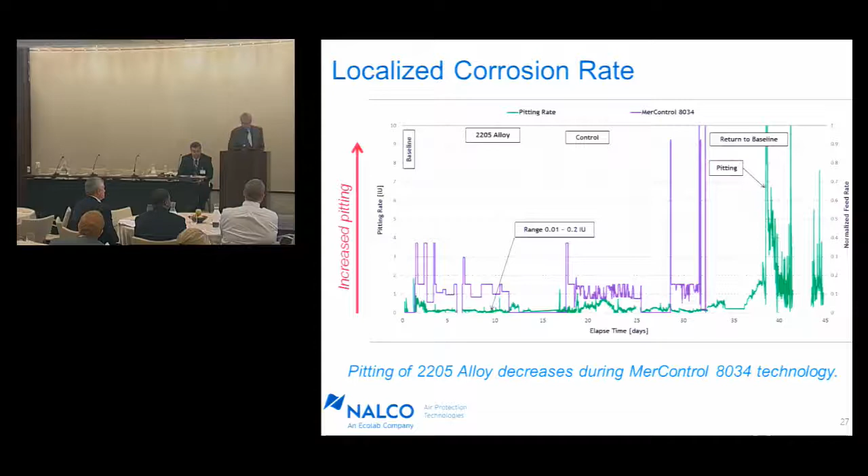We've also done this study in terms of 317L and seen very similar results. And yes, we are still doing more work, as every good researcher does. I'm not really satisfied with one method of measurement. And we're backing this up with more and more data as we generate it with various demonstrations. So if you're interested, we're interested in helping you look at this as well.

I also promised you that we look from the beginning to the end. If we're transferring the mercury from the flue gas using a wet scrubber, it's got to go into the water. Where does it go from there? The concern is with lowering limits on your water discharge that are just around the corner. In fact, Nalco is working with the EPA to figure out what kind of test protocols, what those limits should be, and what technologies are going to be available to you to help meet those discharge limits.

We're interested in making sure that our customers are also compliant to water discharge issues. And that's where these two products come in. Very simple products to apply. They specifically target mercury, but also other heavy metals.

What we've seen, and I'm not going to cover this in detail today, is as we make these additions, we also control the form of selenium and improve the removal of selenium as a contaminant from your water discharge as well. But specifically what we're looking at here are cations, mercury, and heavy metals.

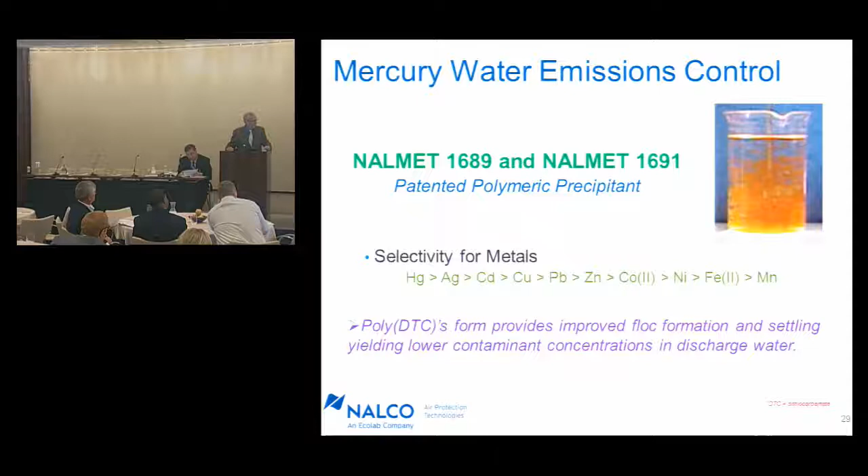In fact, as we continue to combine these additives, we find that we actually improve even further. So it's a synergistic effect. As we control the mercury and capture it in the scrubber to prevent re-emission, we also assist in the water quality on your discharge side.

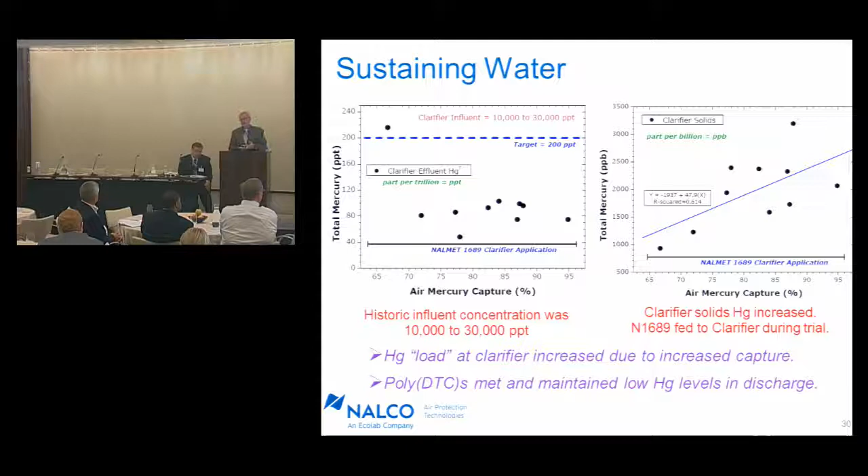The reason why the fit is not very good is because this particular water clarification unit treated several scrubber discharges at one time. And so it was always a continuous mix between various scrubber outlets. So that's where the scatter comes from, quite frankly, in that data. Point of the matter is capture it, speciate it, capture it, remove it. Okay.

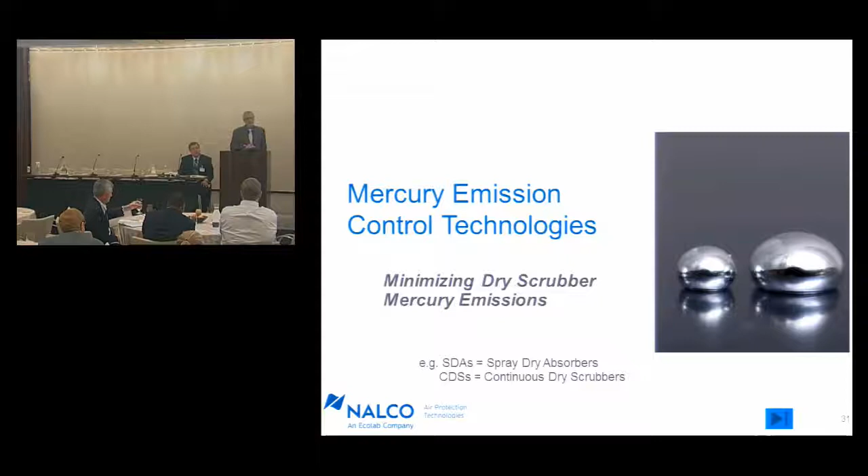And I want to take a few minutes. The next technology that's coming out, quite frankly, to help you meet your SO2 emissions is going to be dry scrubbers and semi-dry scrubbers. Why is this important? Because it reduces the amount of water usage for your plant. Lower water usage is better for all of us. I'd much rather drink the water than use it for a scrubber operation, quite frankly.

This is a technology that we've developed. It's an inorganic sorbent. It is non-halogen, which means it does not contain any halogen to generate the oxidation or the speciation of the mercury. And it is non-carbon. It does not contain carbon as a dispersant, an additive, a whatever. It is inorganic technology, designed specifically for dry and semi-dry scrubbers, and it achieves low emissions.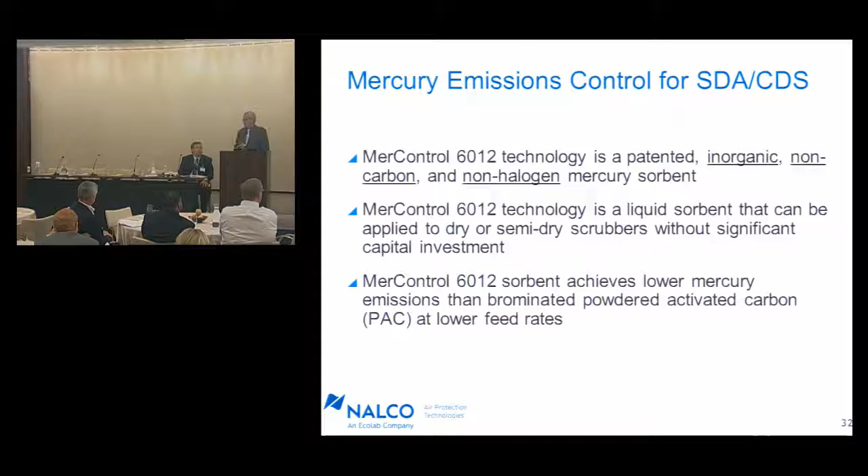Now, you've been to the papers, you've heard spray dryer absorbers, SDAs, CDSs, as they're known in the industry, do not require any additives. They get nearly 100% mercury removal. Well, they might, and I think they do in some cases. But as I'm standing up here, the chances of your unit getting 100% mercury or 90+% mercury in a commercial application, this is the extra insurance that you need. This will get you there with very little use of material.

You can see this here. We compare it to carbon, and we also compare it to a dry material that we produced as well. The bottom line here is that we've come up with a patented, unique application technology, as well as a composition of matter technology that, when applied to your spray dryer absorber, is very simple to apply, low capital cost, uses what you have in place already, except for what we need for our chemistry, and allows you to very quickly meet your MATS limit, very effectively.

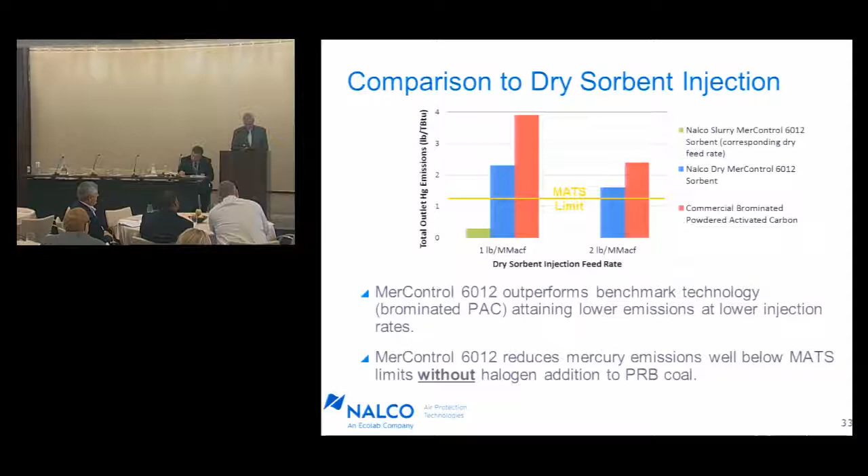I'm not going to go through the numbers. You can see that they're fairly low. The key point is, in terms of balance of plant, ash passes the TCLP, it does not affect your SO2 capture. It doesn't affect your downstream equipment. It doesn't affect your upstream equipment. It is non-corrosive because it is a non-halogen material, and it does not contain carbon.

It is a potential solution for you when you go forward to install that SDA or CDS. It will ensure that you can get the mercury limit requirement that you're looking for.

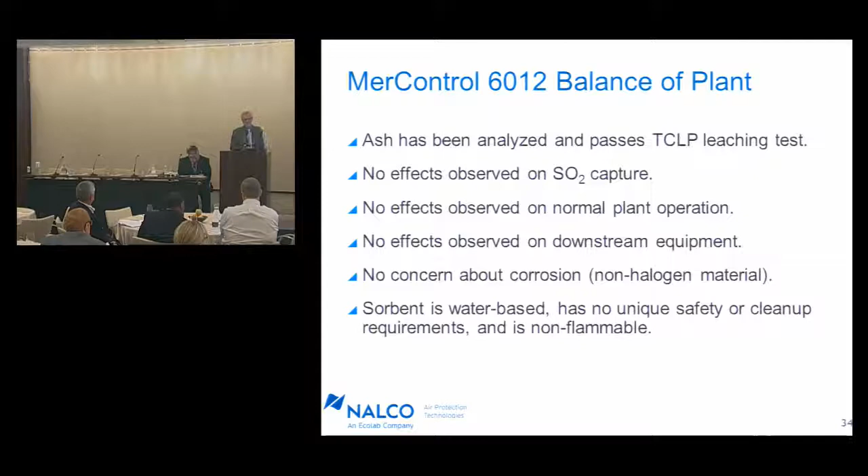So, yeah, leave that up there, but you can read it later. I think I want to basically conclude at this point. I've pretty much used up more than my time that I intended.

I just want to generally remind you that we've provided a technology that is patented. We are the patent licensees for the U.S. that allows you to get speciation, control your speciation. The key here is to control that feed rate to get the speciation that you need. No more, no less. Get to the compliance level. 8034, 8034 plus technology, scrubber additive technology that's patented that'll improve the efficiencies of your wet scrubbers.

Utilize the air quality control devices that you have. Why add more to your unit operation? Why add more to your operator's concerns? And we control this now using our control monitoring devices, and we've been running successfully on units that are cycling through load changes. And we're maintaining mercury emission levels well below MATS. Water treatment is reduced and controlled.

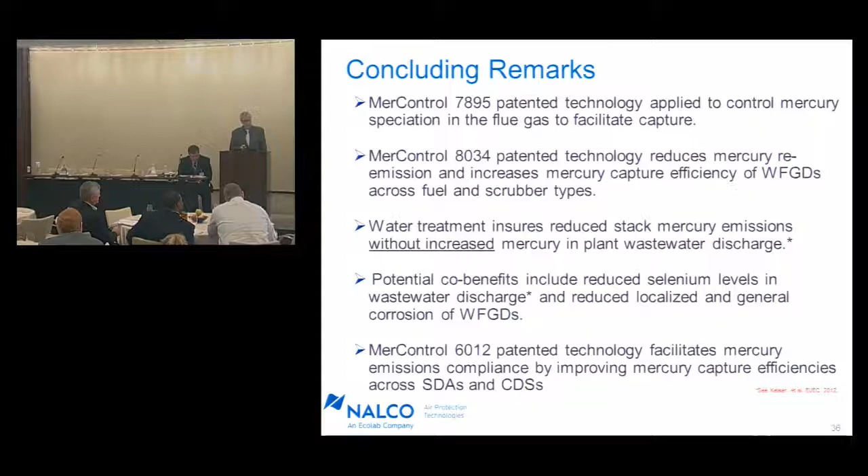The co-benefits include selenium, and I apologize, I did not include that data here. I just don't have the time to show you everything. But it helps with selenium. It reduces localized and general corrosion as well. And we'll be happy to help you monitor that and look at that at any point. And then technology for your SDAs.

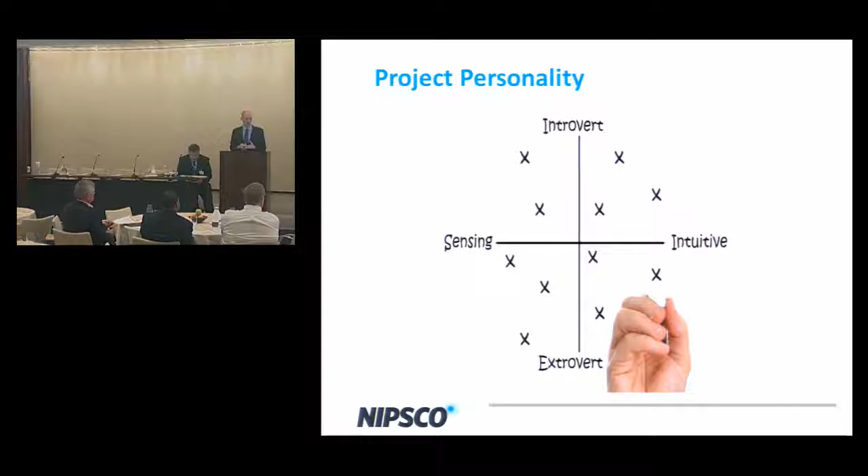And what you have to do there is be decisive. And you can't let that non-match person lay around on the project too long, because I've seen too many projects that had that personality ruin the whole project because they had other agendas, or they caused rifts between the owner and the contractor and the engineer, your construction folks and your startup folks. So really be decisive on that.

If you see an issue there, no matter what level of the organization you're in, be decisive and remove those non-matches, those folks that aren't budging. Remove them quickly once you really have established that, hey, it's going to take a lot of effort to get this person or this group around to where we need them.

And the key there, other than making that critical early decision, is we really look for an 80% match. And this doesn't mean everyone has to think the same or everyone has to always agree. You need some challenging thoughts. You need good candor on the project. But what it does mean is you have to have at least 80% of those folks, especially on a big complex job, and that includes your contractors, your vendors and suppliers, and your engineering organizations, headed in the right direction, working together, communicating well, collaborating to ensure success.

So look for that key number, and if you see that number as less than 80% when you get started, you really need to take a step back and reassess that, because once you get into it and you're millions of dollars committed, it's difficult to back up at that point.

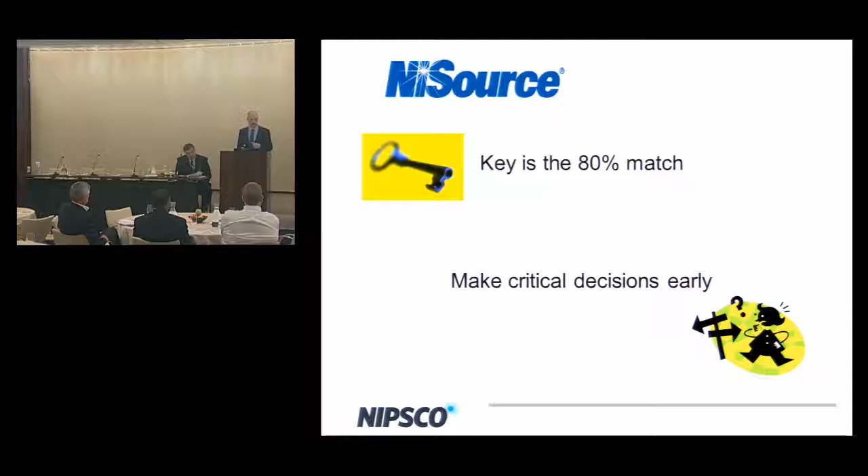The next piece is understanding your procurement planning. This is another area where I've seen projects get in trouble. And what I mean by that is, what are your project or program drivers? So if you're starting an ACI program, right? An ACI project in and of itself is not terribly complicated and not terribly complex, pretty easy to solve. If you're starting on a program where you're going to put in maybe 5, 10, 15, 20 of these systems, depending on how big of an organization you have, that looks a little different, and your procurement planning looks a little different that way. So understand what's driving your project.

Is it time? Is it cost? Do you have quality issues you have to meet with these regulations, right? Even though we all have a tight time frame, we're all trying to manage our budgets, really the key issue here is from a quality standpoint. It doesn't do you any good to get this installed in time if you can't meet your requirement or meet your limit. So understand your project drivers and really spend a lot of time up front.

You know, we all talk about project charters and project plans, and it's popular to say we charter the project, we develop a project plan, because that's the PMI thing to say. I'll guarantee if you really spend the time up front to get your construction and startup and commissioning folks in there, your engineer and your suppliers involved up front, polling them around what's going to drive my project and get all their perspectives, you'll come up with a better list of risks to start with, and you have a better contract structure and a better procurement plan going forward.

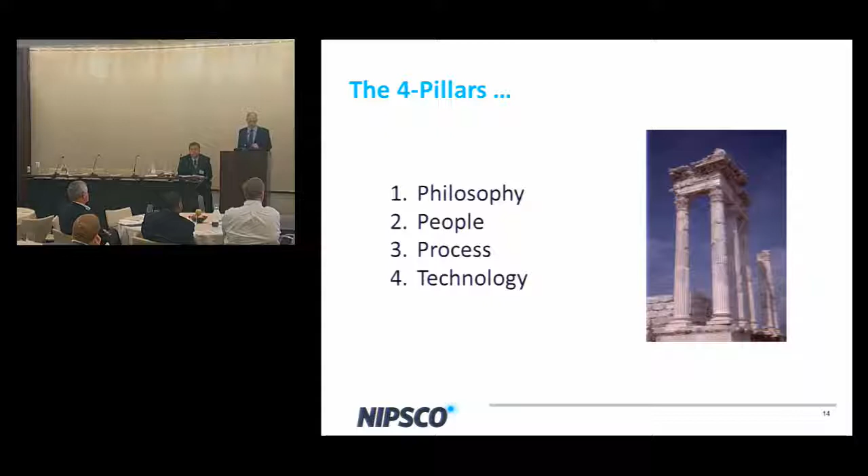And lastly, this technology piece that gets left out a little bit, and I'll speak just a minute about that. So tying back to those 4 pillars, that vision and strategy has to come from the senior leadership. If the senior leadership believes in project management, if they enforce it, if they don't let you kind of do it sometimes, but when it gets too hard, or man, I just don't want to sit down and go through another project review meeting, or I don't want to read this project charter and look for issues. I don't really want to dig into this project, to this business plan and see what it really does to the balance sheet.

If management gets lazy around project management, if senior management gets lazy around it, then the folks executing the projects are going to follow that same lead, and they're going to get lazy around it, and sooner or later, it's going to cost you money. It's going to cost you money because you're going to miss one. You may go along and get 8 out of 10 of them right, but those last 2 may be the one that gets you in trouble.

And as we've seen across the country, and Indiana being no different, it only takes one miss, especially a bad one, to really ruin your reputation with your regulator. And once that reputation gets marred, it takes a long, long, long time to get that back. And so if you have a reputation for success, a reputation for good project management, and your senior leadership say that's the vision, we're going to enforce it, we're going to follow it, and we're going to support it, it pays dividends all the way down the line.

Second is that skill set, making sure you have the right skill set. Sometimes you have to pay for it, but I can tell you in the long run, it's worth it. And that match piece I talked about. Don't get this big personality mismatch on your project. If startup hates construction and construction hates project management and the engineering folks don't talk to anybody else on the project, you're going to have problems.

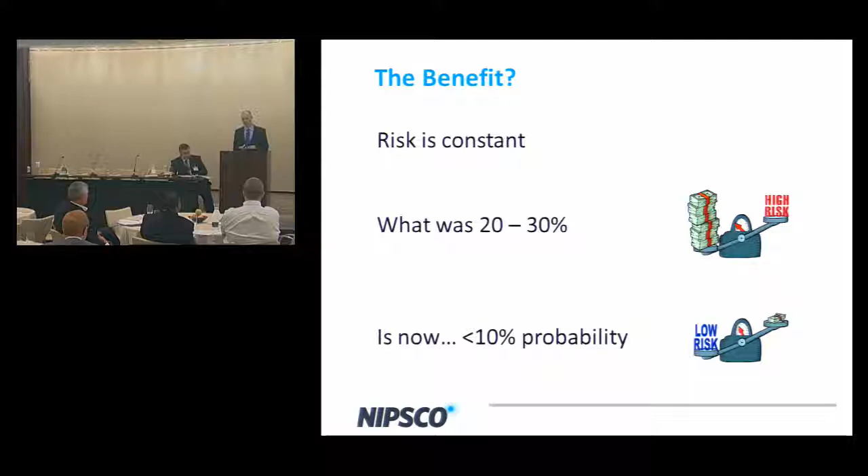But the point being, the devil's in the details. There's some little things there that you can look at that really can help turn the coin from an unsuccessful program to a very successful program for your organization, for your ratepayers, for your shareholders, and you'll get recognized for that, I'm sure. Thanks.